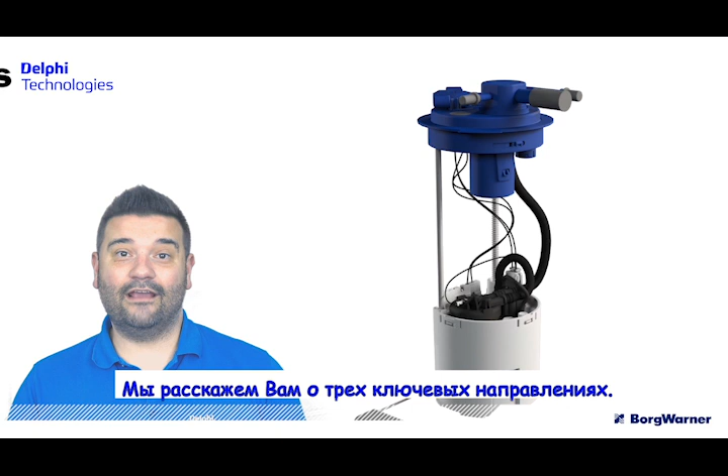Welcome to this session all about fuel pump modules. We're going to take you through three key areas: we'll look at the fuel system and where the module fits in, we'll look in more detail at the fuel pump module and how it operates, and finally we'll take you through a basic test of how a technician would diagnose and identify a faulty fuel pump module.

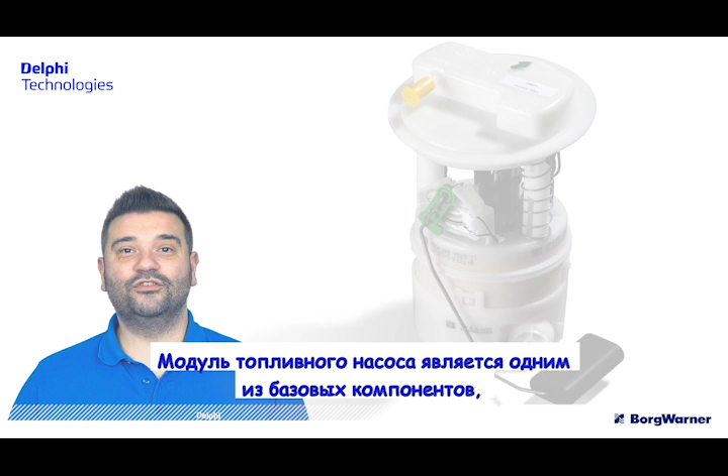The fuel pump module is probably one of the most forgotten about things, but it's absolutely essential to the running of either your petrol engine or your diesel engine.

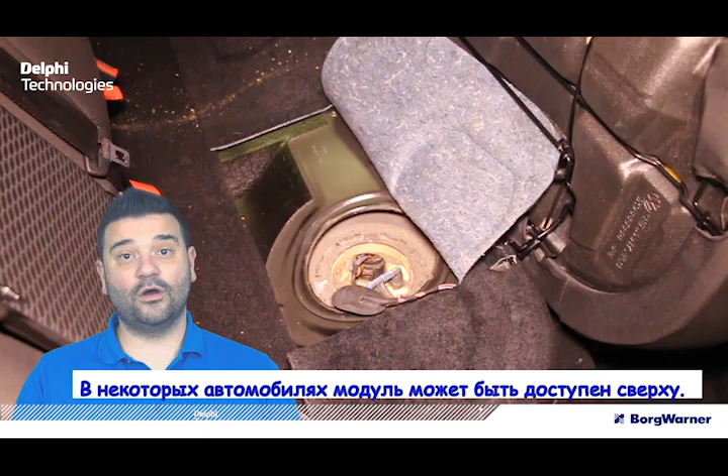If we look in detail at the fuel system components, we always start off with the tank and the fuel pump module. It sits inside the tank and can be accessed from the top, or on some vehicles the fuel tank has to be removed and then the fuel pump module can be removed from the tank.

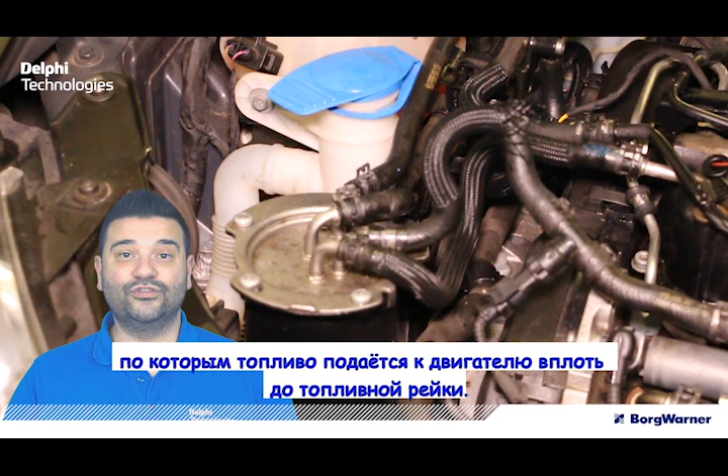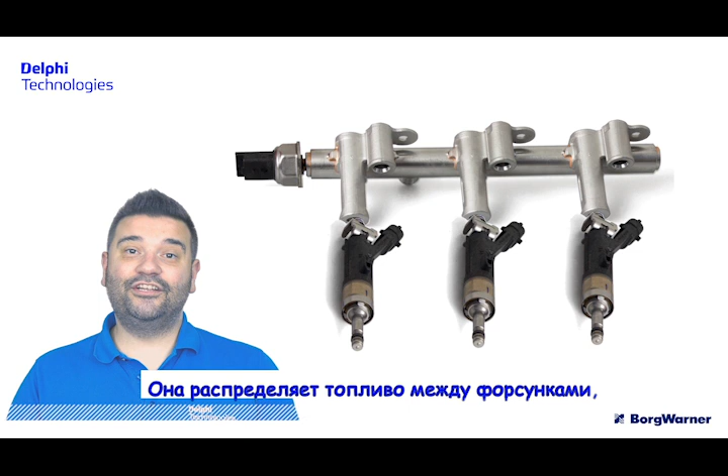After the fuel pump module, we then have the fuel pipes, which carry the fuel through to the engine and onto the fuel rail. Depending on the system, there may or may not be a filter in line. When we get to the fuel rail, the fuel is delivered and shared to the injectors, and the injectors spray fuel into the cylinder, keeping everything running perfectly.

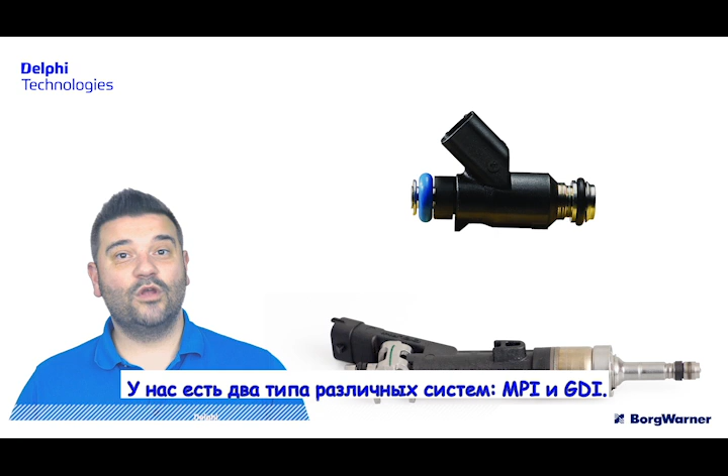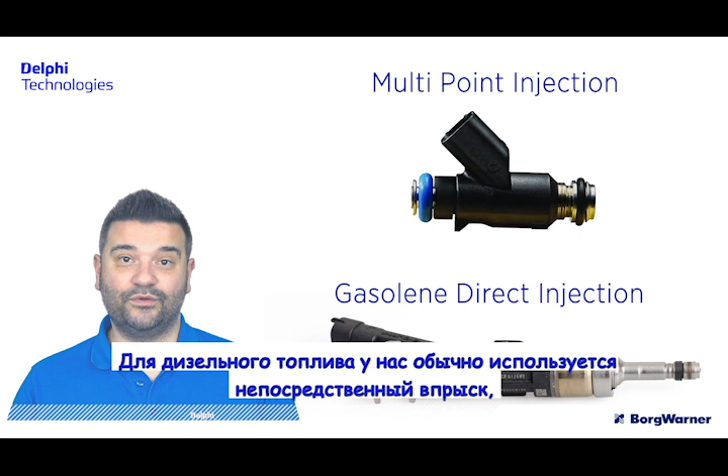There are two different types of systems: we have MPI and GDI. MPI is multi-point injection, GDI is gasoline direct injection, and petrol engines fall into one of those two categories. For diesel, we generally have DI, direct injection, or CRI, common rail injection. All of these systems require a fuel pump module.

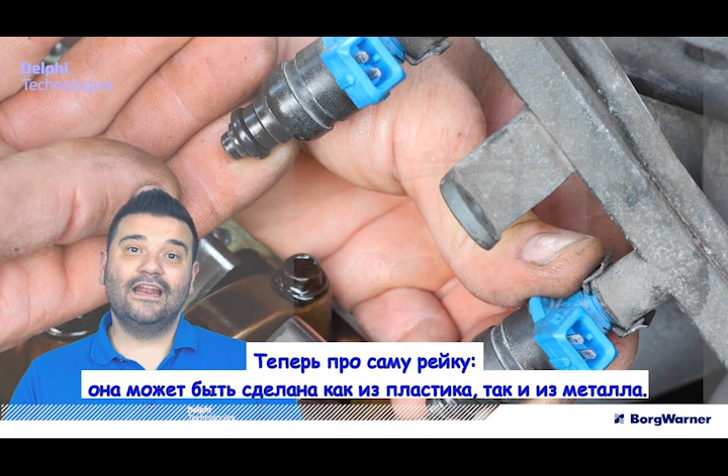On the rail itself, it can be made of either plastic or metal. Traditionally, earlier systems were all made of plastic. Later systems are metal, but all GDI injector rails are metal.

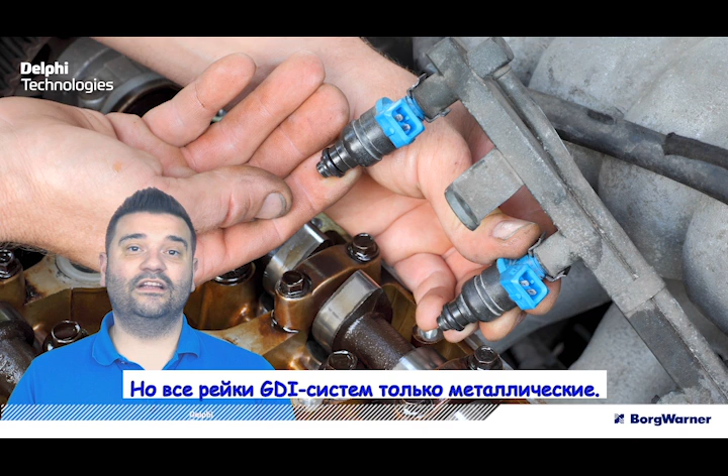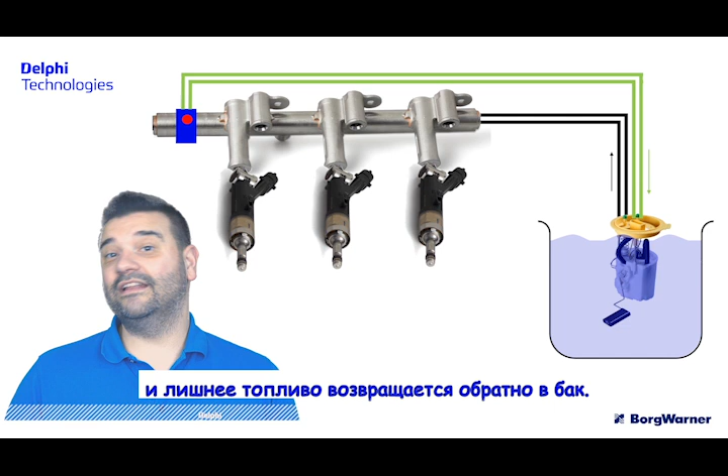Let's look at an MPI system, that's multi-point injection. This system can be one of two designs. The first is a return system: fuel leaves the fuel pump module, travels down the fuel pipes to the engine, where it sits on the rail. At the end of the rail there's a small pressure regulator that maintains just the right pressure in the system, and any fuel that's not needed is returned to the fuel tank. So the pressure regulator, the bit that makes sure the pressure is just right, sits at the end of the rail.

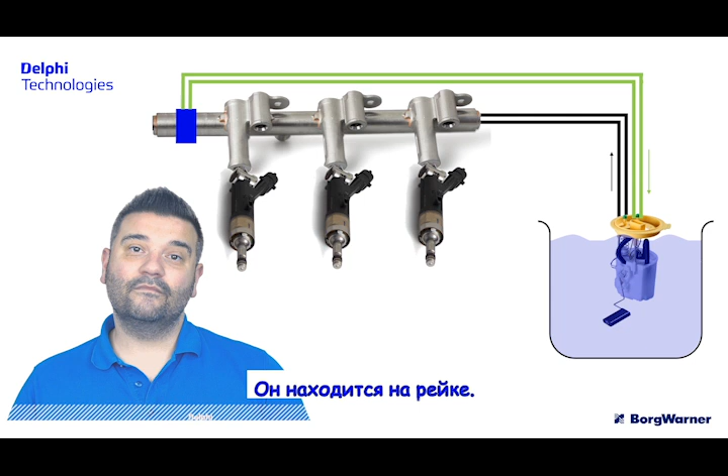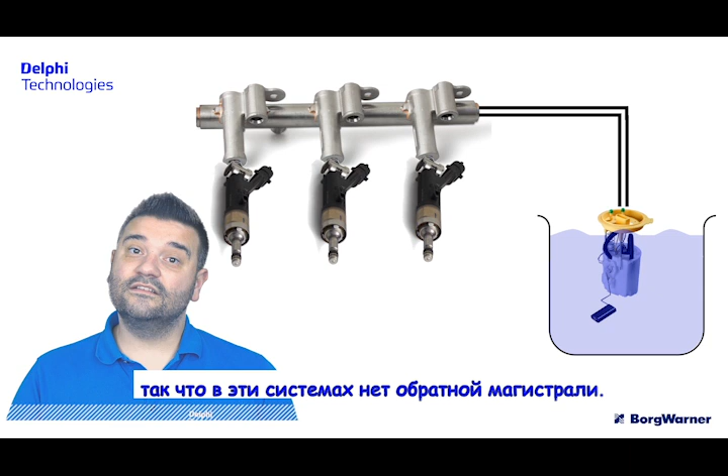Later systems move the pressure regulator onto the fuel pump itself, or just as it leaves the fuel tank. These systems were returnless - they had one pipe that went from the fuel pump module all the way up to the rail, with no return. So let's have a look at the fuel pump module in a little bit more detail.

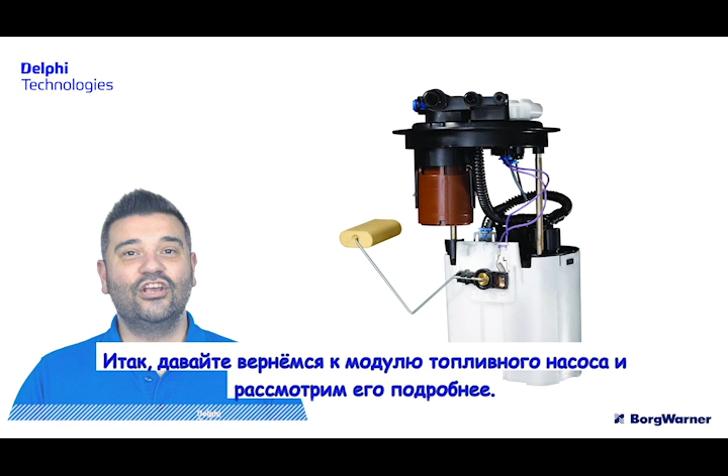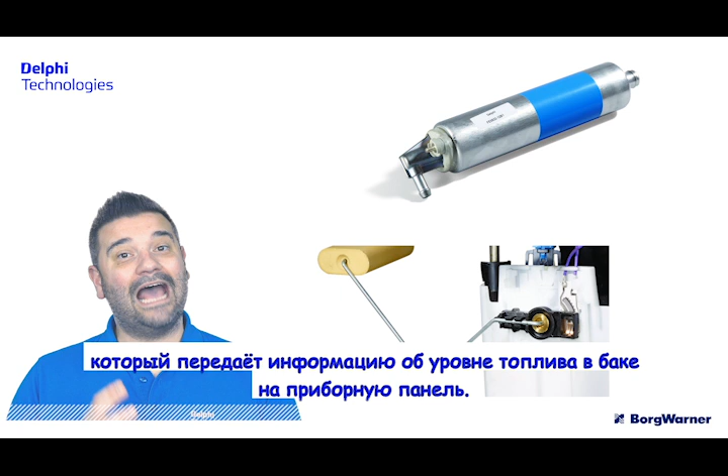The fuel pump module is made up of two sections. We generally have the pumping part, which delivers the fuel to the engine, and the sender part, which delivers information about how much fuel is in the tank to the driver via the instrument panel.

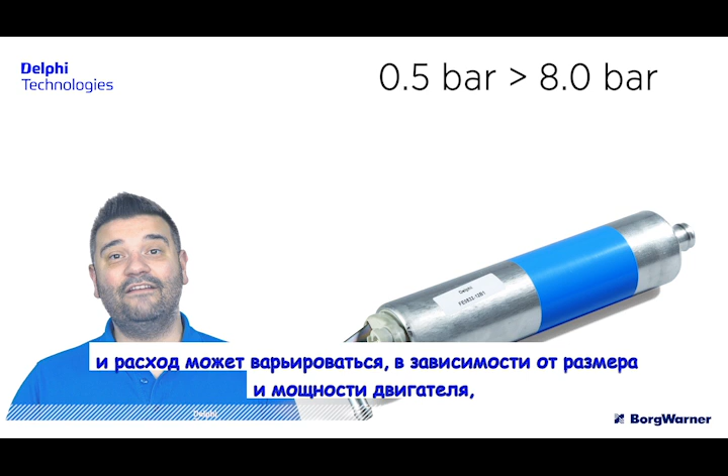The pumping module itself can be looked at in one of two ways: it delivers pressure as a first stage, and second, it delivers flow. As a rough guide, the pressure from these pumps can range from anything from 0.5 bar all the way through to around 8 bar. In terms of flow, they vary depending on engine size and power output, ranging anywhere from 70 litres an hour up to 200 litres an hour.

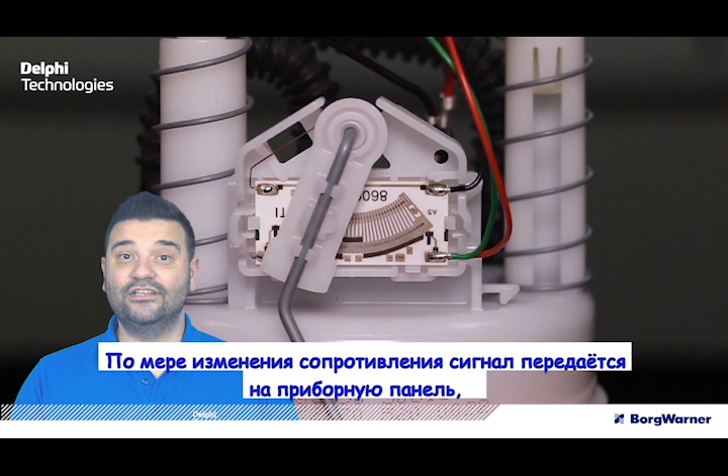We're going to come back and look at the fuel pump in more detail, but for now let's quickly look at the sender unit. It consists of a metal arm with a plastic float, and as the fuel level rises, the float lifts up, and the arm is connected to a variable resistor inside the module. As this resistance changes, the signal gets transferred to the instrument panel, displaying the correct level of fuel relevant to what's inside the fuel tank.

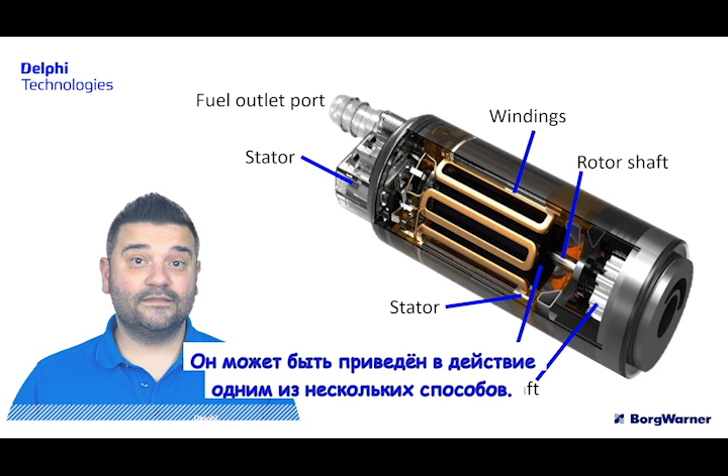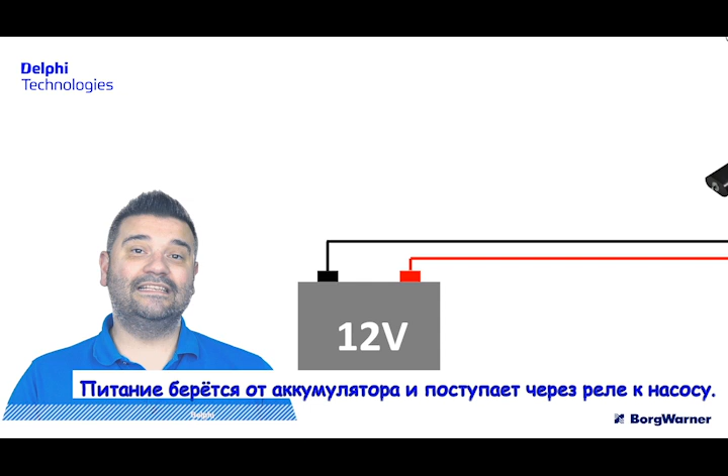Looking at the fuel pump module itself, the pumping elements can be powered in one of a few ways. The first, more rudimentary way is that power is taken from the battery and sent via a relay or some form of control directly to the pump. When the engine's running, the pump's running; when the engine goes off, the pump shuts down.

So this setup has been as it is for quite a while, but then we realised that we don't necessarily need the fuel pump running at full power the entire time. For example, if the engine is simply idle or light load, then we don't need the full pressure and flow that the fuel pump can deliver.

So in order to be more efficient and reduce emissions, it was discovered that if we reduce the power to the fuel pump during certain conditions, say while the engine is at idle, then we can reduce the electrical load on the engine, and if we have to produce less electricity, then we don't have to burn as much fuel.

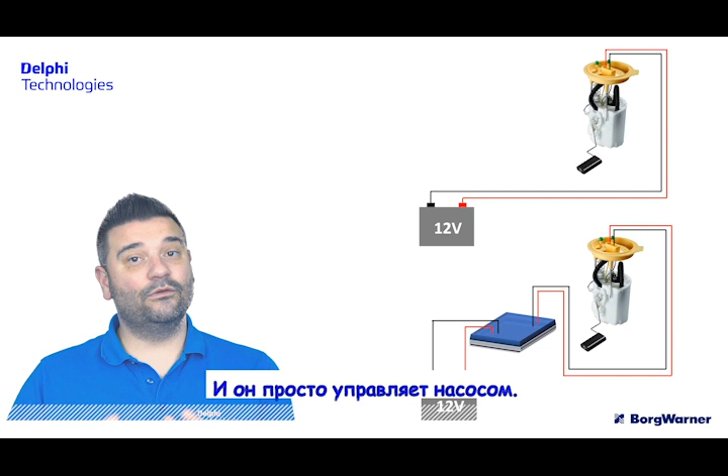So the two systems are: we either have direct power to the pump and it runs all the time, or we have a variable power to the pump. Now to do this, a controller or an ECU is required, and it just sends a signal to the pump, and it can turn the pump's output up or down depending on the driver's demand.

So we've had a brief overview of the fuel system and we've looked at some of the components. We've looked at the fuel pump module and the sender in a little bit more detail. But now I want to move on to how the system would be tested by a technician to identify a potentially faulty pump module. Now, the technician can perform one of a few tests.

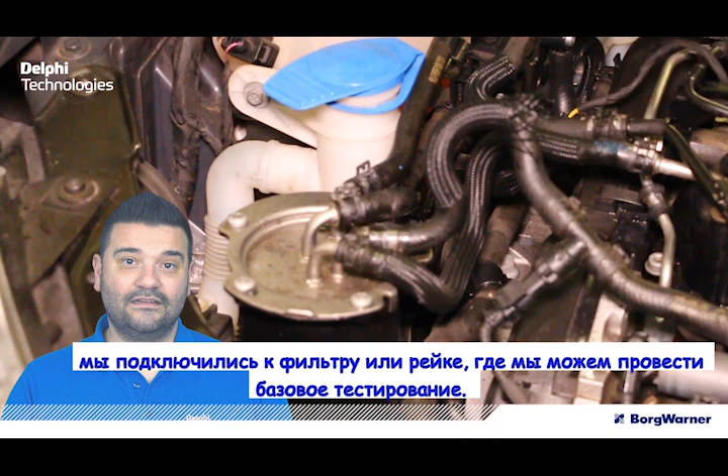The first one and the most easy one to do is a basic pressure test. So the first step is we connect our pressure tool and pressure gauge to the vehicle. Delphi Technologies pressure gauge operates from -1 bar to +35. And we connect it to usually where the fuel filter or the fuel rail is, and we can carry out a basic test. Now it's important to note that at this point the technician isn't sure whether this is direct power from the battery or this is fed by the computer, which is controlling the pressure.

So to avoid any incorrect readings, the best practice is to plug in your Delphi Technologies diagnostic tool and run a special routine that operates the pressure of the pump at maximum. So it doesn't matter then if it's controlled by an ECU or it's directly powered. By running the diagnostic routine, you will always get the same results. The pump will operate at its normal maximum pressure.

That way the technician can perform the pressure test, get the result, and he knows that the result is a valid one and isn't the reduced value, isn't that of because the ECU is turning down the pressure of the pump because the engine's idle, for example.

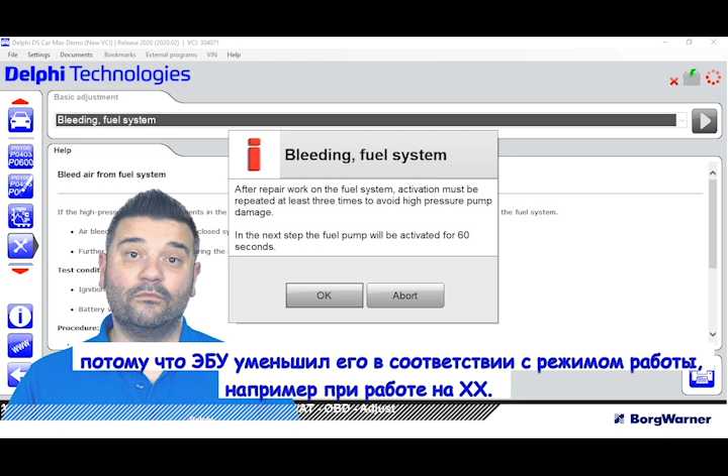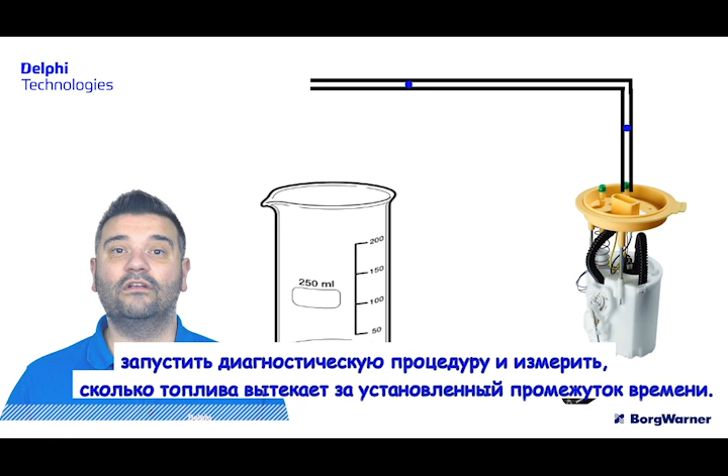So once the technician has confirmed that the pressure seems okay, they can easily then carry out a flow test. This fuel flow test consists of putting the fuel pipe into an open graduate, running that diagnostic routine, and seeing how much fuel flows out over a given time period. It's quite common to use something like 30 seconds or even 1 minute, and then you take that data and you compare it to technical data.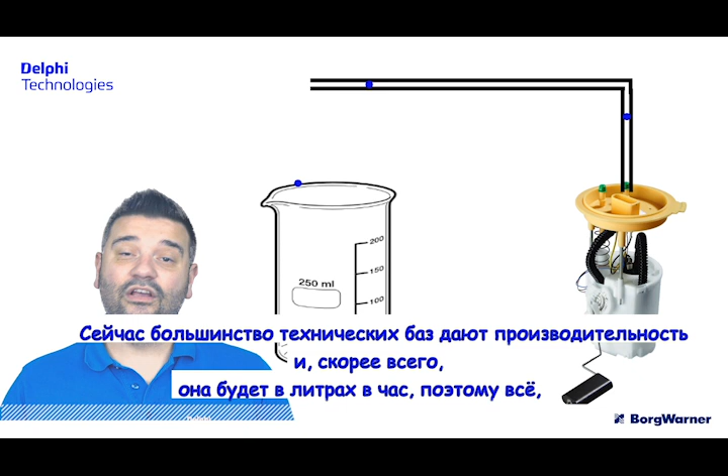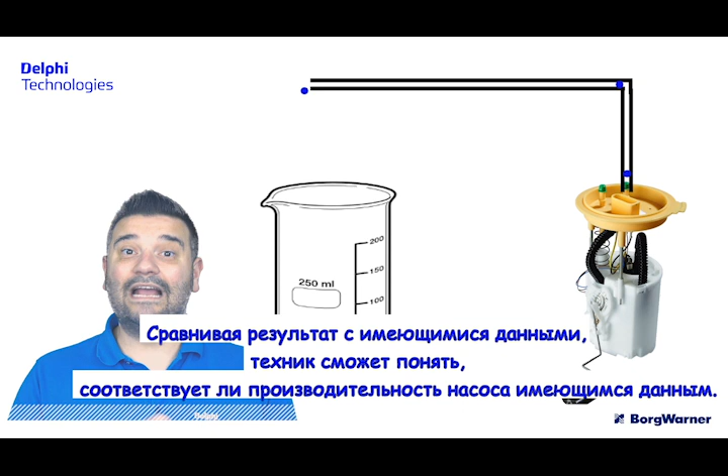Now, most technical data in this will give a flow value of around, it'll be in litres per hour. So all the technician has to do is, if they run it for 1 minute, is multiply it by 60, and that gives them litres per hour. And by comparing that to technical data, they'll be able to see whether the fuel pump is delivering fuel in spec or it is out of spec and further diagnosis or replacement is required.

So if that technician does find that the pressure or flow is incorrect, then the best next step is to go all the way back to the fuel pump in the tank, where it may or may not be easy to access. They connect the same equipment onto the fuel pump directly and they run the same test again.

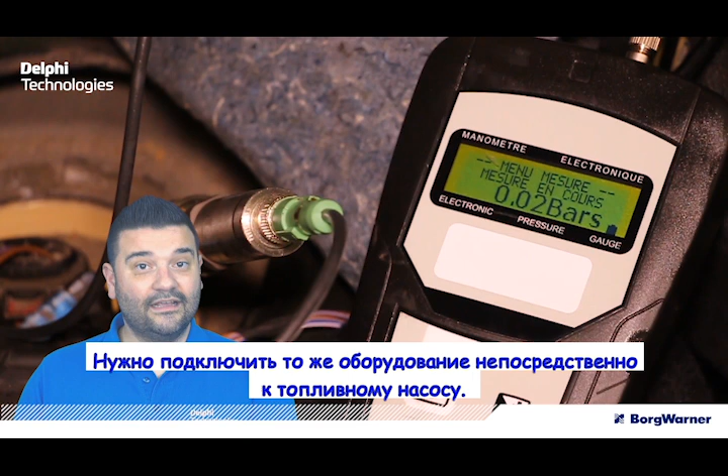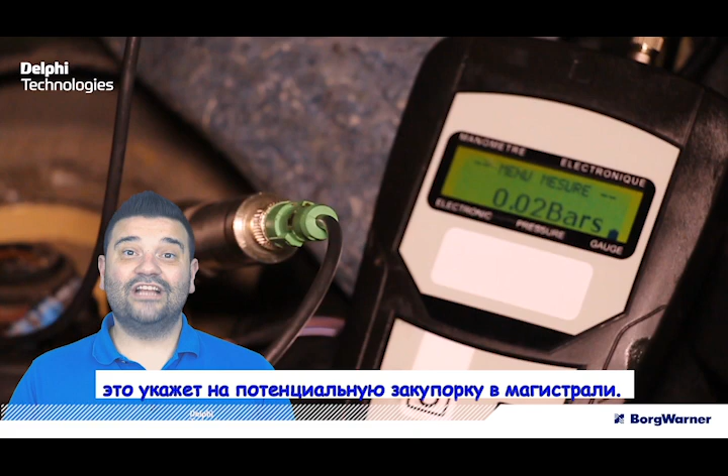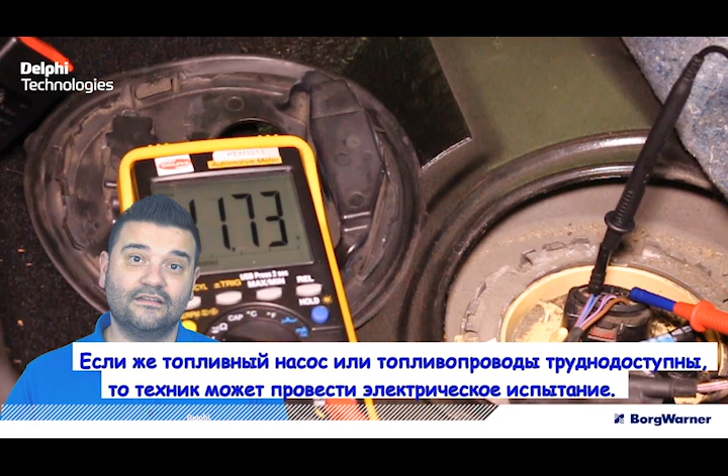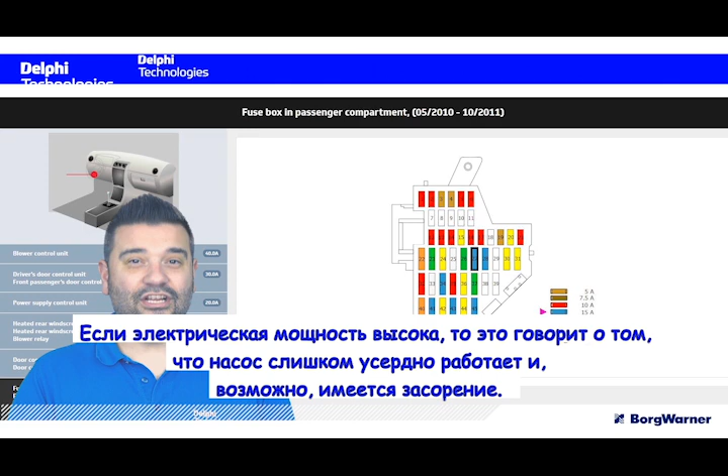So if the fuel pump or the fuel lines aren't particularly accessible, then the technician may choose to carry out an electrical test. Using an oscilloscope from their toolbox, they can actually test the amount of electricity flowing around the pump. If there is too much electricity flowing around the pump, then that suggests the pump is working too hard and there may be a blockage.

If there is not enough electricity, then that could suggest either a faulty pump or there is a fuel leak and the fuel is flowing too freely.